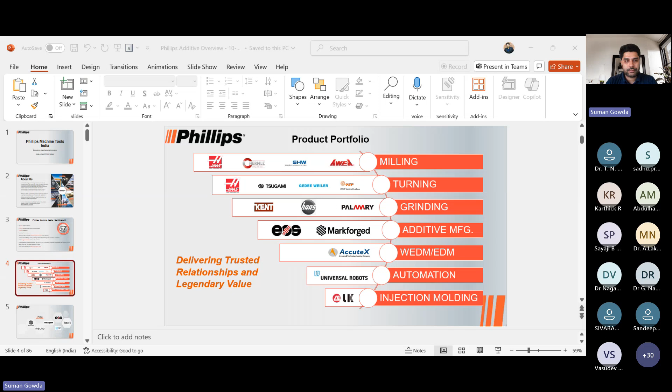In Phillips Machine Tools, we represent numerous varieties of products. Additive is... sir, your voice is low. Okay, let me turn off my video as I'm starting the session. I hope the network should be clear now.

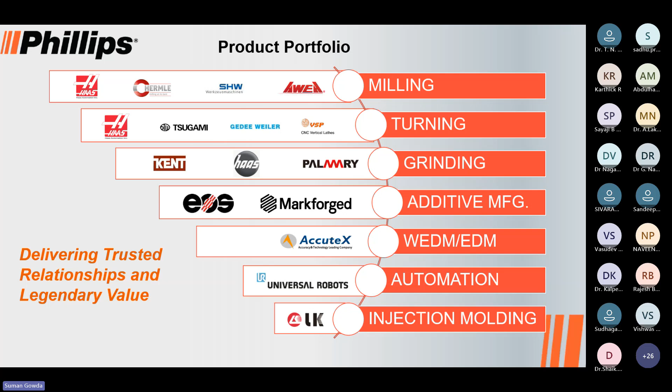Additive is one of our verticals which we started around 6 years back, and now we have close to 8 different solutions in additive, catering to applications across all varieties of materials, from metal grade materials to composites to resin to powder. We also have research-oriented materials used for direct metal deposition, and processes for laser melting of wire and metal powders. As I mentioned, in today's session we will concentrate on composite grade printing, and we will also look at liquid-based printers.

Coming to the printer portfolio, as you might have seen in the last couple of days, there are a lot of varieties of technologies in 3D printing alone, which give different kinds of solutions. Some solutions are for printing parts for prototyping applications, some for end-use or one-time use applications, and some can also be used for mass production, where the tooling cost and printing cost can be compensated. So now we are in an era where we try to bring 3D printing to almost all verticals and applications wherever we can. Looking at that, composite-based printers are one of the major highlights.

This is a process where you can print parts which are as strong as aluminum. But imagine the printer you use for printing it is a simple desktop printer—you just place it on your tabletop and print a part, and that part is as strong as aluminum. That's where the major strength of composite-based printers and materials comes in. So we will have a thorough look at that particular technology.

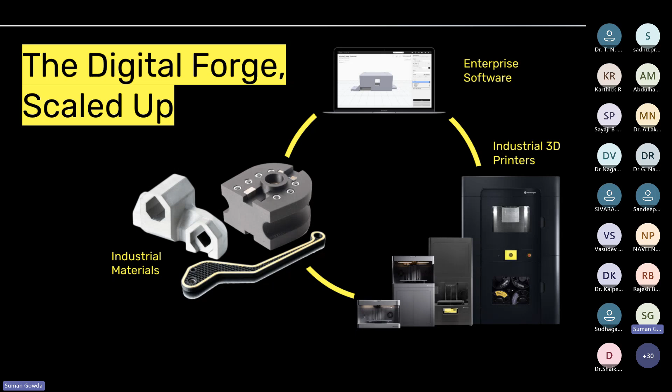To give you a concept of how the technology works, I'm sure you've seen an FDM printer printing. The concept is the same as FDM printing, and this has got 2 nozzles. If you've used printers with 2 nozzles, one is for the plastic and the second is for the support. Whereas in our Markforged, the first nozzle prints both the model and support, and the second nozzle is dedicated only to printing the fiber.

The fiber acts as the main strength, like a pillar of a house or building. The main strength for pillars are iron bars, and we use cement and concrete just to surround it so the iron rods aren't exposed to the external environment. We follow a similar concept: we build a boundary using regular plastic, and inside that boundary, our continuous fibers get deposited. The plastic we use for regular printing is also a composite grade material called Onyx.

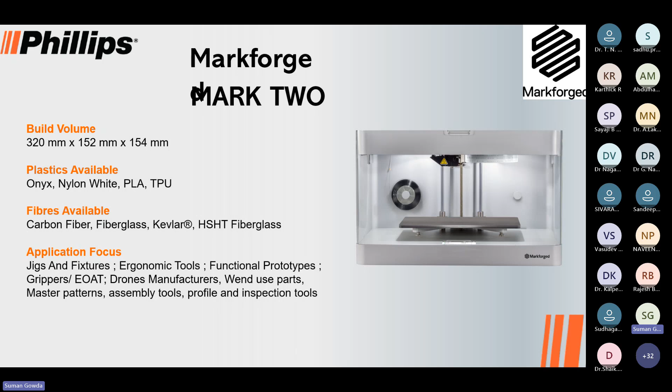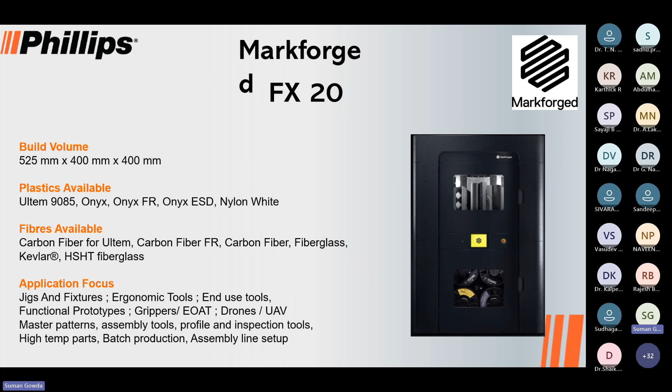Because of the heat, the fiber gets bonded with the plastic. As we build it layer upon layer, the part strength increases by 10 to 20 times. We always have an option to select the amount of fiber we deposit. We can deposit fibers at 100% throughout the part, or hardly 10 layers in 100 layers. Or if my part is 100 mm, I can have fibers in the bottom 5 mm and top 5 mm. It completely depends upon me how I want to add the fiber.

So now moving to the next step, which is the applications of this. The reason I'm talking about applications is because whenever we look into an FDM grade machine, we always start with prototyping, we always start with fitment.

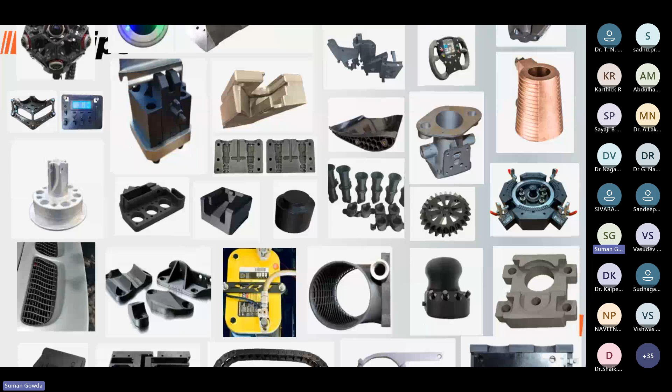But imagine an FDM grade printer where we talk about applications similar to that of metals. Whenever you consider a metal grade printer, worth around 1 to 2 crores or even more, we talk about manufacturing of tools, grippers, and dies. Those are the same applications we talk about with a composite based 3D printer.

Because the composite based 3D printer gives us an advantage that none of the plastic printers can provide. At the same time, when necessary, the same printer can also be used for printing regular plastics, since we have the option of printing with regular PLA and rubber grade material in the same printer. But the main USP of this printer is printing with continuous fiber, which gives extreme strength to the part.

Yes, we hardly utilize 100% of the fiber strength, but even if you are able to utilize 50% of the fiber strength when we deposit in the parts, we are still getting parts similar to or superior to the strength of aluminum.

We have got a lot of customers who have started their production even without a CNC machine. They are printing all kinds of clamps, holding grippers, and tools using a small FDM-based composite 3D printer, which can give them parts as strong as aluminum.

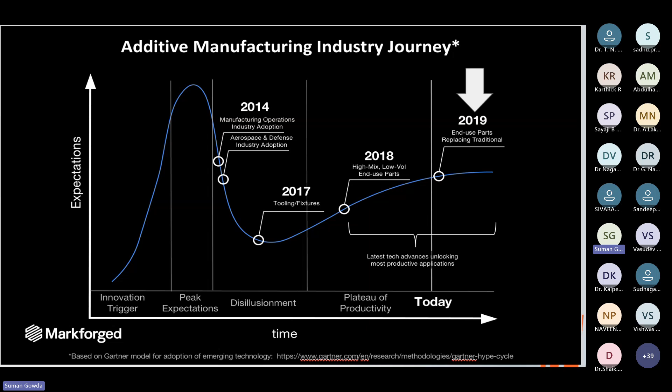Metal is the front runner for a lot of applications when we're talking about conformal cooling or applications which require a hybrid process. Composites also give a huge advantage when we consider using composite-based materials for producing end-use tool parts.

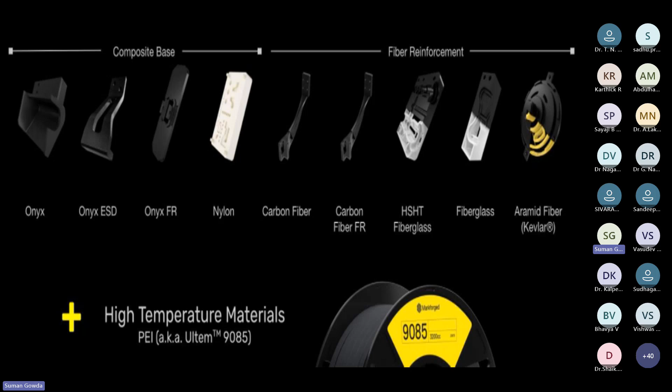But the best thing is we even have software which tells us what percentage of fiber is required for the load that is being applied. For example, if you are going to...

Let's consider the same part, a turbine housing where you're going to mount it and apply a load of around 10 kg—then a regular plastic like our Onyx is sufficient enough for the job. But if the weight is 100 kg, then we also get to ask the software.

So this is the kind of application, and this is where I'm going to apply the load. What should be the fiber reinforcement for this part? The fiber software itself tells us what kind of fiber is required.

You can get to know more about it as you work on it. Once you've started working on this, you can take a judgment and say this will require fiber of around 20%, or this will require fibers in the boundary that's sufficient enough. But if you're not able to make that judgment, the software itself will tell you what needs to be done, so you don't have to make trials to get the best settings for the print. The software gives the solution to us.

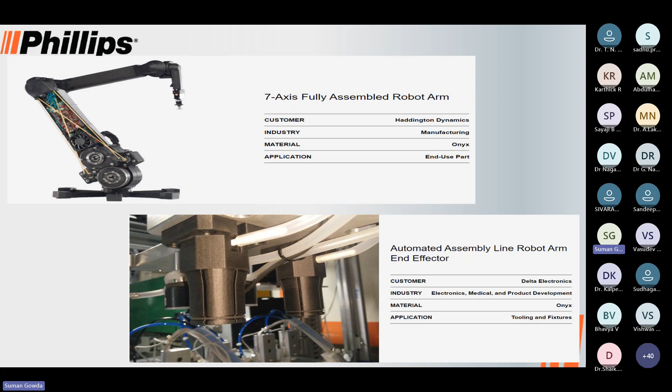Here are a few examples of parts printed with regular plastics. Even though it's a regular plastic, it is still superior in strength to ABS, and it can withstand numerous chemicals and more than 150 degrees of temperature. That gives it a huge advantage for a lot of end application needs. This is a small graph comparing ABS and nylon grade to the Onyx grade material.

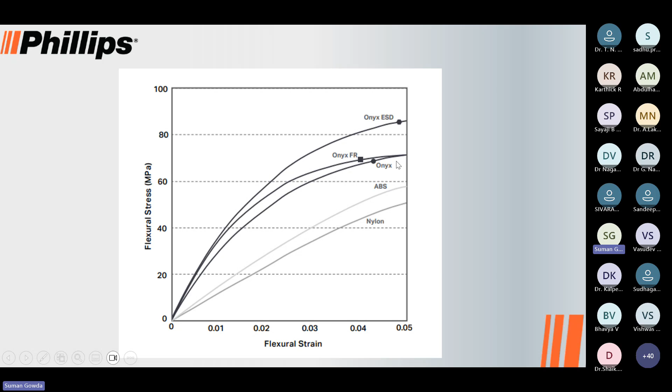When we talk about continuous composites or fibers, there's a huge difference when we add a small amount of fibers and mix it along with our plastic components and draw a wire. So this is what you get. The first image is actually the chopped carbon fiber, and when we get our regular onyx plastic wire, that's a combination of nylon plus this amount of chopped fibers. This will give me strength which is only 2 times that of a plastic.

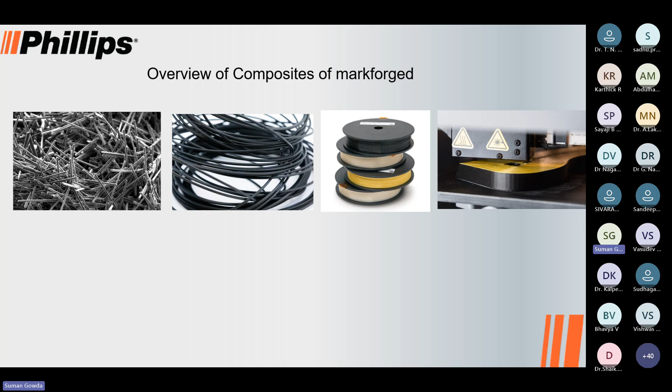But the main strength comes when I utilize the continuous fibers. This is how the printing would happen of a continuous fiber. As you can see, the black is deposited on the boundary, whereas the yellow, which is the continuous Kevlar fiber, is being deposited on the entire part as per my end application. Because of this fiber, I am going to get a unique strength.

In the image, if you can see, it's the software image. If you're able to see the blue line, this is the fiber path. In this part, we've decided to give the fiber only in the boundary, whereas the infill geometry is still around 30%. So this part is now 50% lighter than the existing aluminum part, but it's still giving the same strength. I can even increase the strength of the fiber by increasing the fiber lines so that the strength becomes more superior based on my requirement.

So the advantage I get over this is the strength to weight ratio is completely under our control. We don't have to depend upon just the density of the part. I can still go lightweight even more than this, but still achieve the same strength required for my end use. So here's what the components would look like once we deposit the material.

As you can see, we have the fiber deposited only in the boundaries. This kind of deposition we call external and internal boundary, so it has covered the fiber with the external boundary, and also the circles are being covered, because there's a point where I might have to do the clamping, and that particular area needs to be strong enough to withstand the clamping force. So I've given fibers even on the circles. It depends on my end application overall.

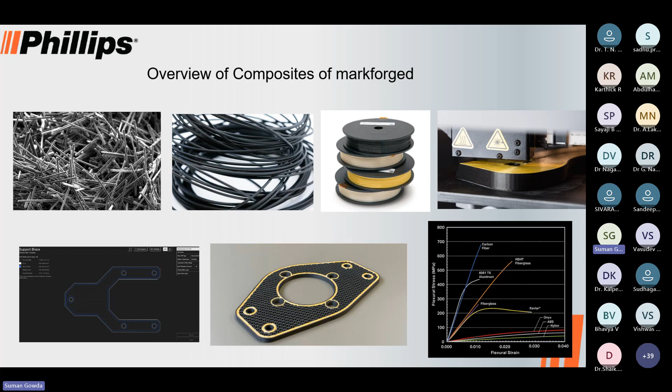These are the kind of things we are actually doing, working out with a lot of institutes. Here's a small example of a small chain link that was printed using an onyx plus carbon fiber combination, and you can see the kind of strength that this particular small part can withstand.

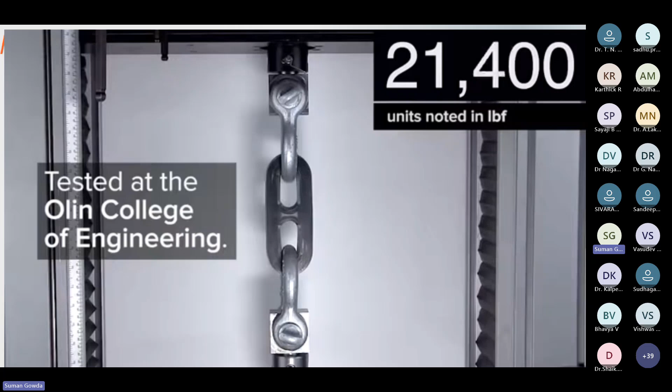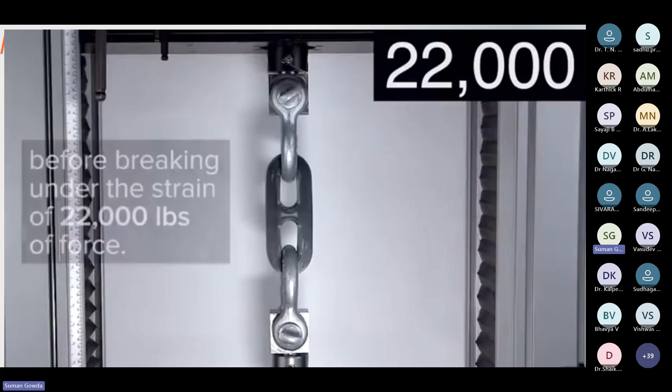So as we saw, the small chain link was able to stand around 22,000 pounds, which in reality is almost similar to lifting a cement truck. Yes, if needed, I can even lift such a huge weight. But the important point here is it only works when we are using the load at the same angle. If I change the angle of my load, maybe it will not even stand 10% of the load, right?

So that's where we talk about design for additive manufacturing. With the Markforged, we also say design for your part or design for your printer. Because when we exactly know that this is what I need to do, or this is what this part wants me to do, I get a complete advantage of this particular aspect.

That's one reason why drone companies have been able to utilize this composite based printer to its maximum potential. Even though they know that this particular part will not be able to withstand around 100 kgs of impact load, for them the main application is just a holding clamp, and if this part can do that job, it's more than sufficient for them.

So that's how we usually go about 3D printing for the exact materials. As you can see, we can print parts used for end use tooling applications, which are very high complex gripper parts, or also used as a maintenance part. This particular part in the middle is an end use maintenance tool, which is like one third of the weight of an original component.

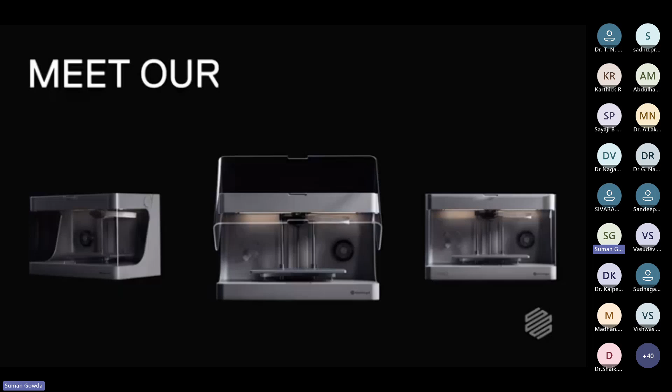Printer, which in my opinion is one of the most useful items you can put on your desk. Our desktop series consists of the Onyx One, the Onyx Pro, and the Mark Two. The product line offers incredible versatility in the applications you can address, and we do this in part by designing everything that goes into your printer. Our machines, materials, and software were all designed to be tightly integrated into one platform we call the Digital Forge. What does this mean for our users? It means every part you upload, slice, and print is streamlined, simple, and optimized for incredible surface finish, accuracy, and mechanical properties. With other 3D printers out there, users may rely on one company for the hardware, another for the software, and a third for the materials. That introduces a lot of uncontrollable variables that can lead to negative consequences like sketchy print quality and a lot of trial and error just to get your part to print the way you want. By contrast, Markforged makes the hardware, the software, and the materials to guarantee the highest quality. The Digital Forge offers a degree of harmony that just isn't achievable when you're trying to overcome the many variables introduced by combining a hodgepodge of systems.

From day one, Markforged set out to address 3D printing differently by creating parts as strong as metal right on your desktop. In 2014, Markforged invented and patented carbon fiber reinforced 3D printing, or CFR, which allows users to make parts as strong as metal just at the click of a button.

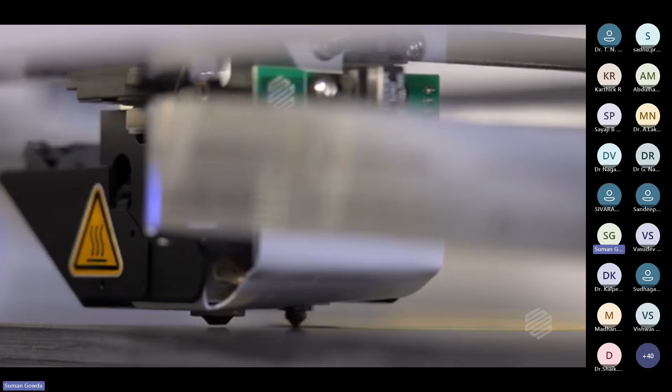Our CFR technology is objectively awesome. It starts with two materials, a spool of base plastic and a spool of continuous carbon fiber. We first deposit a layer of plastic out of a hot nozzle and onto the print surface. After that, a second nozzle comes in and irons down continuous fibers right on top of that plastic layer.

The printer builds the part layer by layer until it sends you an email letting you know that your print is complete. Right off of the printer, the part has properties comparable to aluminum, all at a fraction of the cost and weight of a CNC machined equivalent.

The core element that ties these and all of our printers together is the software. It's called Eiger and it's free to use. The best part is you can access it from anywhere. You just navigate to eiger.io from a Google Chrome web browser and voila!

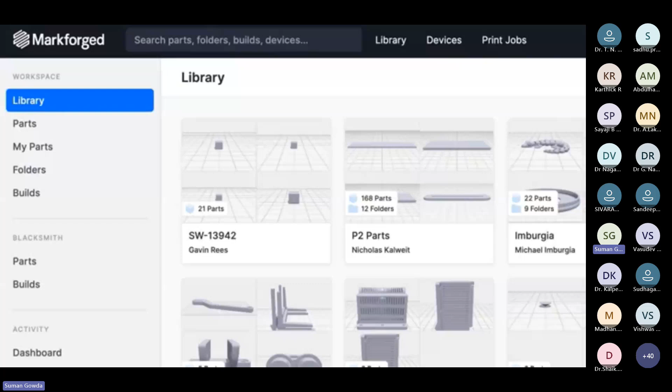I've literally kicked off prints in the back of an Uber. Seriously, for all you folks out there plugging in USBs to the back of your printer, back of an Uber.

Eiger isn't just a slicer. It's an all-in-one part library, version management, and cloud collaboration tool. It will, of course, slice your part, meaning it converts your part into a set of instructions that's readable by our printers. But our slicer is optimized for our materials and printers, meaning there are fewer steps users need to take to get a great part out of the printer.

While Eiger is super simple to use, it's also designed to give power users the unique ability to control where continuous fibers go in the part and how the part responds to mechanical stresses.

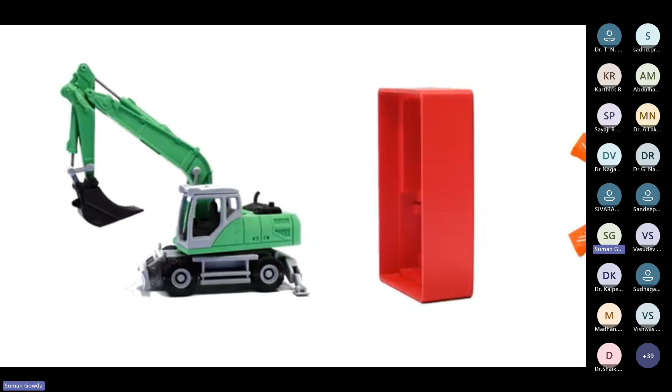All told, the Markforged Desktop Series printers empower you to address the widest variety of applications, from prototyping to end-use parts as strong as metal. Our printers offer a simple-to-use system that makes some of the best-looking parts you can build at your desk.

We knew from the get-go that people were going to use this printer for incredible applications like high-strength tooling or even production parts. That's why the team sweat the details that are immediately evident when you pop the hood of this machine. The single-body aluminum chassis the printer rides on was deliberately engineered to resist the torque induced by the belt drive system. Why does this matter? The stiffer frame results in higher accuracy and improved surface finish, resulting in the high-quality parts that Markforged is known for.

The precision extruder constantly pipes data back to the system to monitor the health of your print wirelessly. Even the coupling mechanism used to secure the print bed uses magnets and is repeatable to within 10 microns. That's nearly 7 times smaller than the thickness of a human hair.

In addition to carbon fiber, we innovated printing with 3 other continuous fibers dedicated for specialty applications, including high temperature and high impact. We also recently announced our own version of PLA, which we call Precise PLA, offering our users a new, more cost-efficient means of validating designs before going into production.

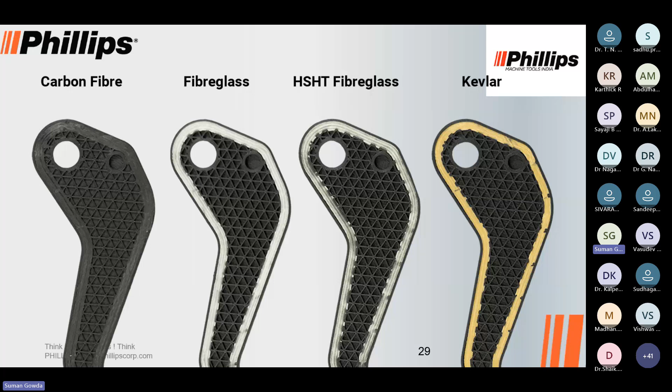So here are the fibers of 4 different types: carbon fiber, glass fiber, HSHT fiberglass, and Kevlar. There's a slight color difference for identification and chemical composition, but overall different fibers give different kinds of results.

Okay, so before I play this video, this is just to highlight how the printing will actually happen on the printer with the continuous fibers. I will keep on explaining as the video plays. So now this is the base.

So this is the base material, what we have is the onyx, which is the black material, and then we deposit around 3 to 4 layers of this onyx just to make sure that we have a good amount of bottom surface. And then you can see we have started to deposit this blue line.

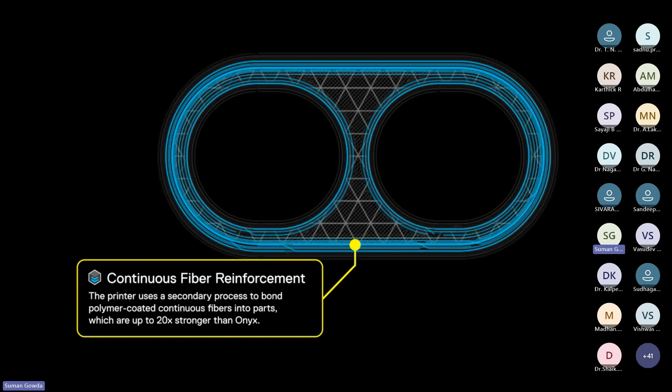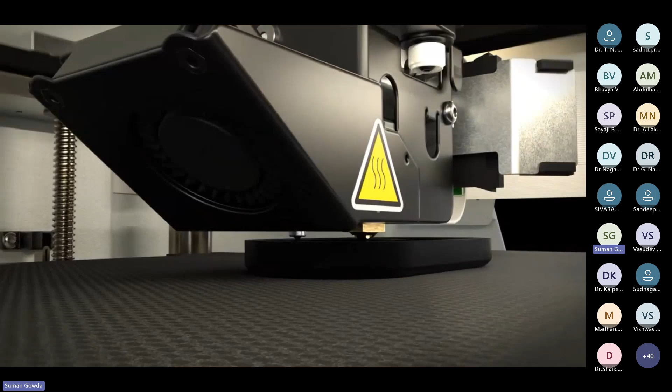So these blue lines are actually the fibers. As of now in the settings we have selected fiber only in the boundary, so we are depositing fibers in the boundaries of the part, and the remaining section is being printed with the onyx. If you closely observe, the external boundary is built with onyx. There are two nozzles: nozzle one prints the onyx material, whereas nozzle two deposits the fiber material.

And when it deposits the fiber material, we are not melting the fiber. We are just pressing the fiber on top of the plastic that we had printed as an initial base, so that the fiber gets bonded with the plastic.

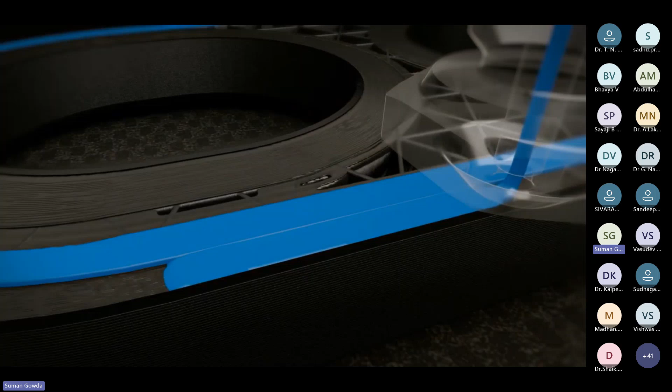So the nozzle in the back has the job of printing with the plastics, and the nozzle in the front does the job of depositing fiber. As you can see, it's a circular fiber material, and we are going to press it, and then it's going to turn into a rectangular shape.

This pressing, everything is pre-calculated from the software. We also have a small cutter which cuts the fiber just before the end spot, so that the fiber doesn't get stretched once the printing of that particular layer is completed.

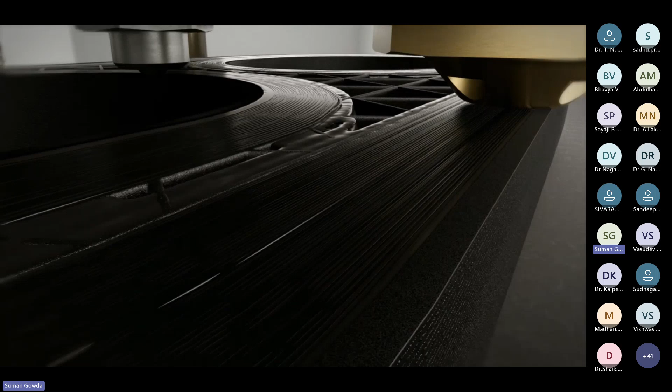So this is just to showcase the material while the printing is happening.

If you look into the kind of X-ray version view, the white material is actually the regular plastic, whereas the blue is the fiber material.

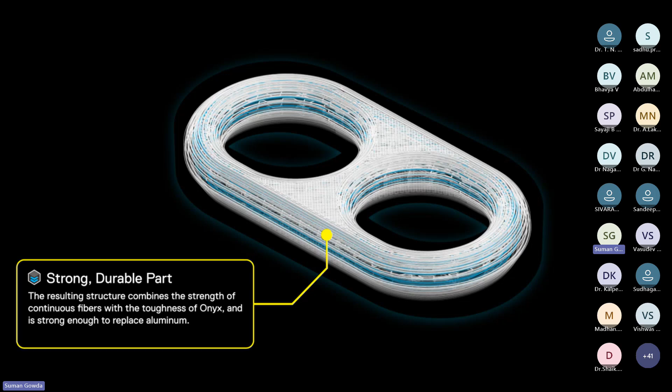So now it depends, like, I'm going to get the same amount of fiber when the part is in a laid down position, but when the same part is in a standing orientation, the amount of fiber that is being deposited will be completely different.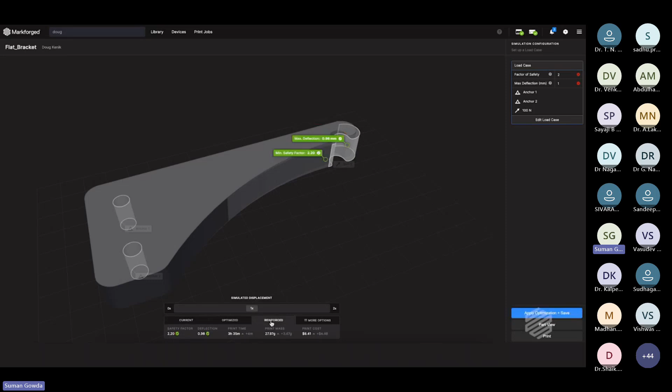And cost. With 3D printed parts in particular, finding the right balance of settings to meet functional requirements can be difficult. We need the part to be strong, quick to print, and cost effective. In the past, we'd have to print and test multiple iterations to dial in the settings, taking a lot of time and materials. Not anymore. Simulation from Markforged allows you to test your part virtually to see if it will be strong enough. You can then optimize print parameters, including placement of continuous carbon fiber reinforcement, all before you hit print for the first time.

So let's use this lever as an example. You need it to hold a 100 Newton load with a factor of safety of at least 2, and it can't deflect more than 1 millimeter, and needs to be as light as possible. How would you achieve that?

Let's look at 3 different variants of the lever. The first was printed with default slicer settings. The second with a solid infill. The third part is optimized using simulation.

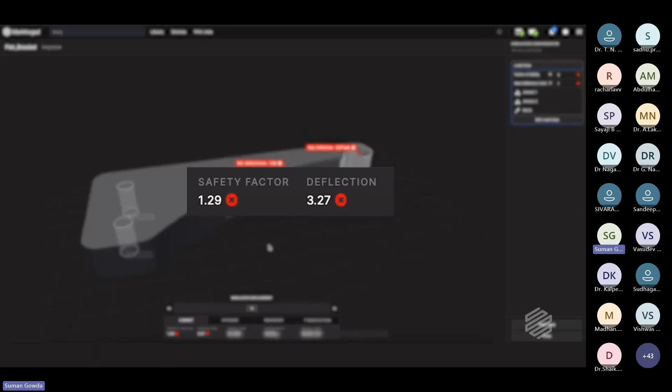We can see in Eiger that the first part took 3 hours and 32 minutes to print. It's not strong or stiff enough for us to use. The second print, with solid infill, took 6 hours and 19 minutes to print. It meets the factor of safety of 2, but has a maximum deflection of 1.8 millimeters.

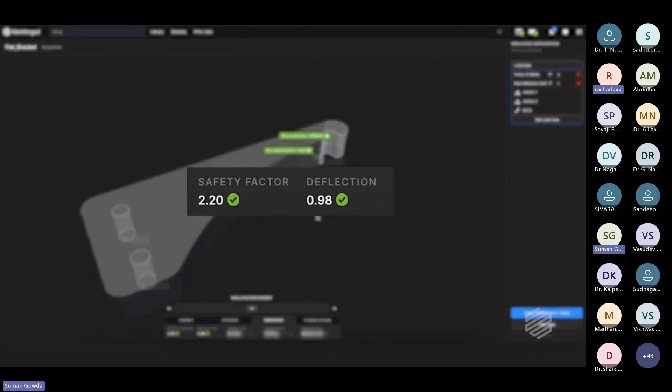The third print, optimized using simulation, took 3 hours and 41 minutes to print. It meets the factor of safety of 2, cutting print time almost in half with the same required strength. With simulation, it took only a few minutes to simulate and optimize this part, meanwhile it takes 14 hours of printing just to arrive at the same conclusion.

No more guessing how much or where to place fiber, or spending countless hours on print-break cycles. Print the right part the first time. For more information on how simulation can save you time.

Okay, so this was just to showcase the benefits or advantages. Once you have started using this software, after working on it for a couple of times, you would have mastered the process of finding the best optimum. It also helps once you've done a few studies or trials on printed parts, so you get to know the best settings for what kind of weight or load being applied, and the varieties of aspects involved.

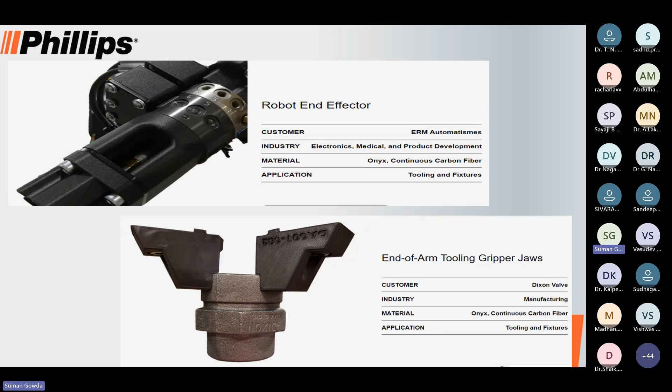So here are a few applications, like robot end effectors or end-of-arm tooling grippers, which were actually machined using aluminum or stainless steel parts, now being replaced with onyx plus fiber combination parts. So you can see a lifting tool.

This lifting tool can lift a weight close to around 900 plus kgs, and a clamp bit, which is a regular simple clamp bit, can hold a weight of around 50 kg. The advantage here is they are using the same clamp bit, just changing the grippers, and it can be used for 5 different kinds of part holding.

And the best thing is they can get all 5 different grippers printed overnight. So they don't have to allot a particular CNC machine for this job, or consult a programmer to write a program for machining, or have the designer wait in the production lab for these parts. He can just fire the print from his own designing seat, and the parts get printed. And as the printers are cloud operated, he can even fire the print from home, and get the part the next day when he reaches the facility.

So these are all the different advantages which the printer provides. Anyway, we have seen this video.

So these are a few of the replacement parts that we have personally done, like some parts which were freshly machined aluminum, easily replaced with onyx plus fiber, or a casting part, or a sand casting application part, or parts which earlier used the casting process, replaced with 3D printed composite parts.

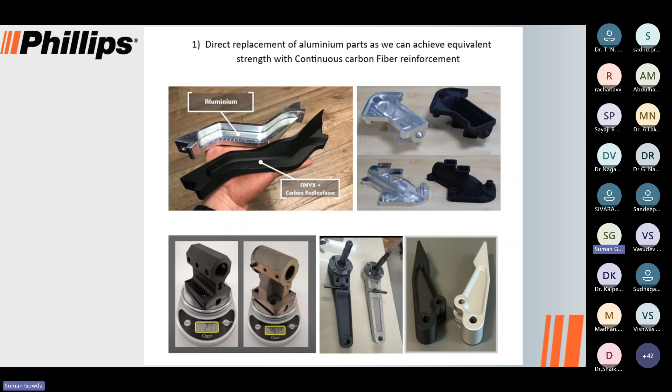The gripper applications, which was actually a complex gripper using the casting process, can be 3D printed within a couple of hours in-house without any worry, matching the same strength and same life of the gripper. So these are a few examples which talk about how we are. This is one of the examples from a company called Siemens.

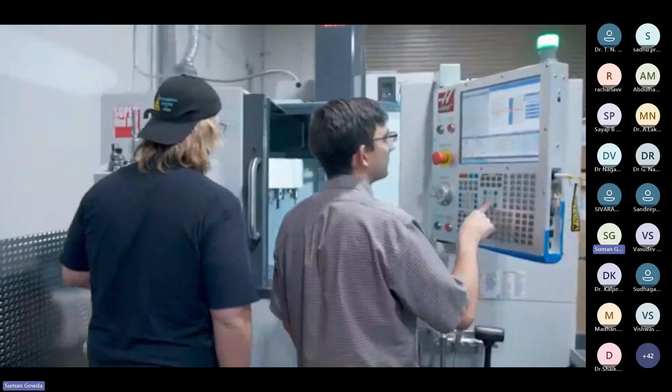The Innovation Center is an end-to-end solution provider within Siemens. We're able to take a concept all the way to final implementation, all under one roof. We saw the capabilities of the Markforged printers and the finished quality of the prints, the strength of the material, and we wanted a more industrial printer to fast prototype and potentially use as final tooling.

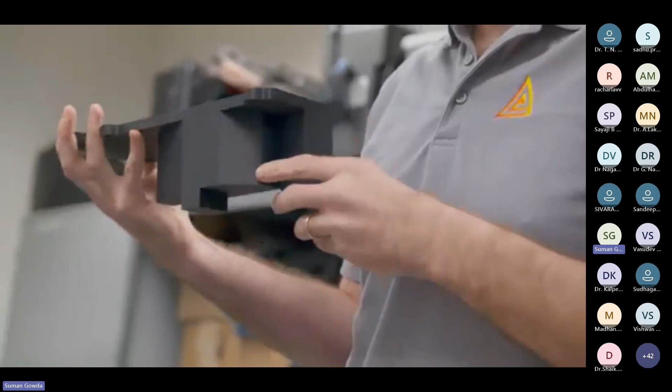When we first used the Markforged printers, a lot of people thought it would just be used for prototypes. There was an initial surprise by our end users that we were actually giving them a 3D printed part they could use in the field, a repair facility, or manufacturing facility as the actual tool.

The major benefit of having the 3D printers in-house is that the time to develop an idea is dramatically shorter. Within a day or two, we can go from an idea we whiteboarded to a CAD model to a 3D printed part in our hands. It drives the cycle time down as well.

The Markforged industrial printers act as a digital factory for us. In the past, you would have to make design decisions and down-select during the design phase. Now we can take three or four different designs, print them out, do the form function test, and then make a decision which way to go forward. It allows us to cut costs, and that money is realized back within the business units.

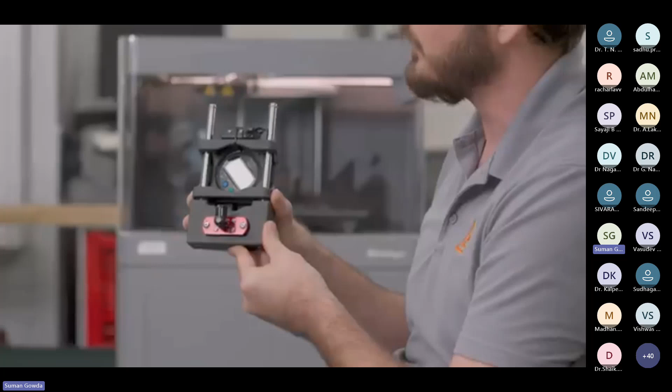With the Markforged 3D printer, we get great resolution on the parts. It looks like a real tool that you would buy from a store, something that would be in production.

If there's an issue with one of the gas turbines out in the field and it has to go down, that means the lights go out or power has to come from somewhere else. So we developed this contoured cutback tool that allows technicians to make a precise cut exactly where they need to. This entire contoured cutback tool has been 3D printed. The only off-the-shelf components we had to use were some screws and the actual pneumatic spindle.

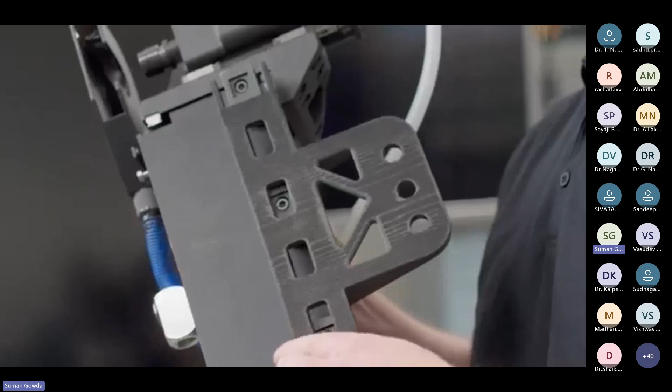We were printing this tool as a prototype, but we found that the Markforged carbon fiber composite material is actually robust enough to withstand field use. So we developed four kits that are deployed locally.

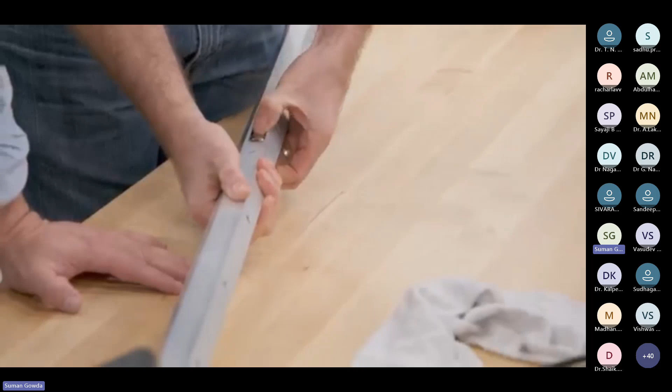The Markforged printers have allowed our engineers to be more innovative by encouraging them to fail fast. It allows them to print multiple different designs and make changes without having to do that in a design space, and it allows them to get to a final solution quicker, to respond to the rapid prototypes we have to develop for our business. With additive manufacturing and the industrial Markforged printers we're using, the sky's the limit.

This was one of the perfect examples of coexisting in the production line, where 3D printing can be used for the same application. Usually what we used to see was that we had to have a highly complex metal 3D printer to have applications for production. But considering the cost per part of a metal 3D printed part, we would not consider it for production — it was only limited to R&D prototypes.

Or it might be something made from aluminum or a cast metal part, or something made from an injection molded part. A lot of varieties of those kinds of parts can be replaced, and as we can see, it can include applications involving air tightness, leak proofing, or ESD properties. We have materials that are ESD safe, and we're talking about FR grade — we have materials which are flame retardant.

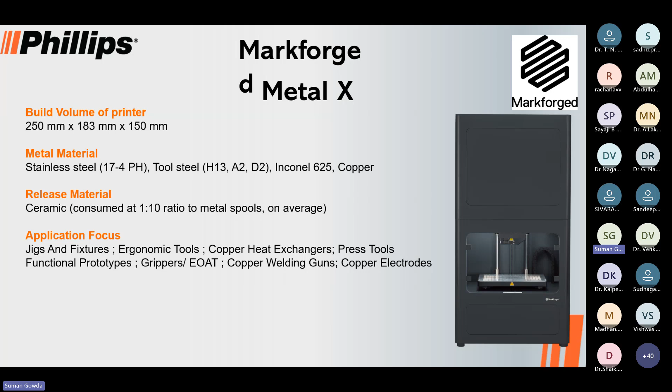Yes, there are a few additional equipment needed for metal like wash and sinter stations, but this gives the advantage that the printer will not stay idle. It's not like if I don't have metal projects my printer stays idle for a month - that's never the case. You can always opt to print composites or plastics whenever needed, and then maybe once a week or once every 2 weeks you get a metal project, you can just swap and print a metal part, which can then be washed and sintered.

So these are the different steps. Before I explain these steps, I'll play a small video so it gives you a complete clear view of metal printing using the Markforged system.

Hey everyone, I'm here to talk today about the Markforged Metal X process. It's a simple, safe, and cost-effective method to go from design to functional metal part. There are 3 steps in this process: printing, washing, and then sintering.

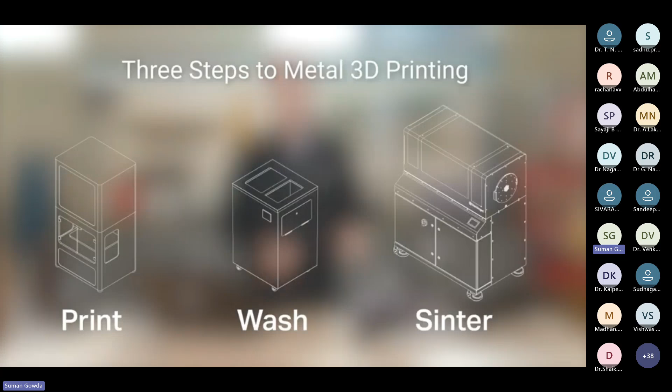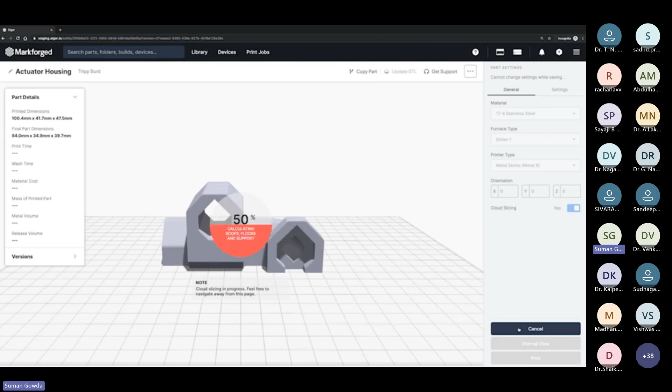First, let's start with CAD. You design your part, then export to STL and upload into Eiger. Eiger is a cloud-based slicing and print management system that comes with every Markforged product. This automatically configures your part based on the material and printer you've selected. When your part slices for metal 3D printing, it gets scaled up to account for shrink and deformation in the downstream processes. It then slices your part into discrete layers, identifies overhang features, and builds supports and a raft underneath your part. As we go through printing, washing, and sintering, Eiger will monitor the part's progress along the way. Let's start this print and go to the Metal X.

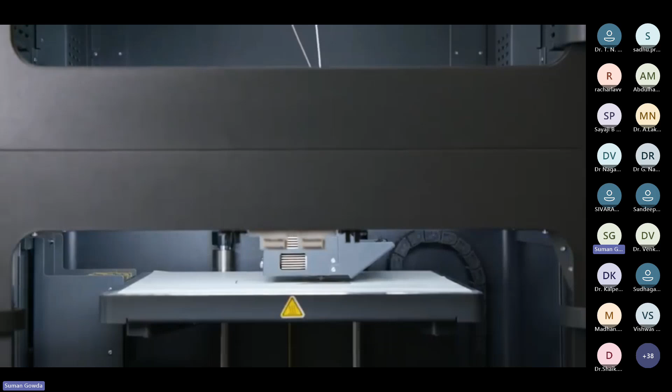Before starting a print, the machine automatically maps and levels the bed to ensure the first layer goes down well. Your print is built of 2 materials stored in this heated chamber above: one ceramic release material and one metal to be printed. This filament material is metal powder safely suspended within a 2-part plastic binder. It gets heated and extruded onto the build plate where the part is created layer by layer. The release material gets extruded as an interface between the part and its supports, so that once your part comes out of the furnace, it's easy to remove.

Unlike other metal 3D printing systems, this process does not require loose metal powder, resulting in a safer and more cost-efficient workflow. 17-4 stainless steel is loaded now. However, with a quick changeover, the system is capable of printing in stainless steels, tool steels, coppers, Inconel, along with several other materials currently in development.

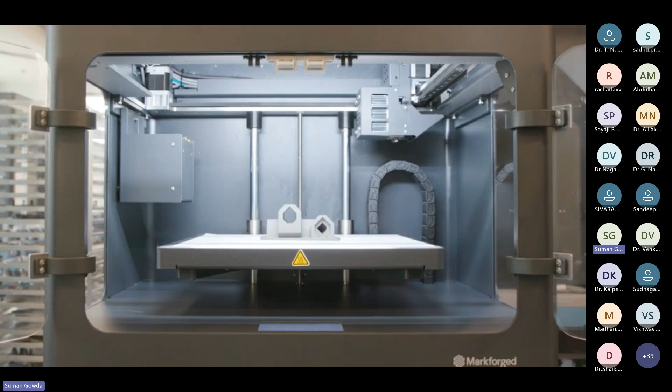Once your part is finished printing, you'll get a notification. At this point, you can go to the printer, remove the part from the build tray, and clear the bed. Now we have what's called a green part. It doesn't really look or feel like metal. However, a large part of it is comprised of metal powder.

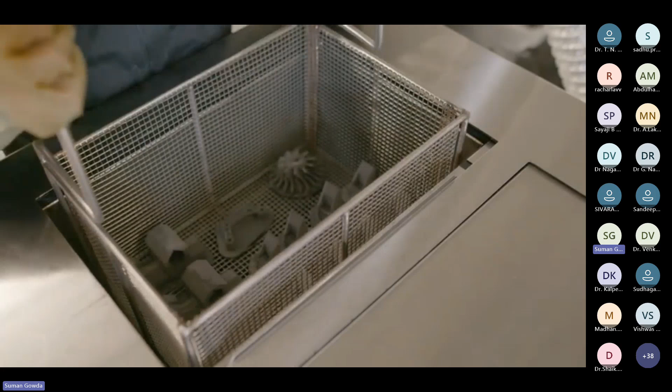Next step will be putting it into wash 1 for the debind process. The wash 1 removes the first stage of the binding material. A green part is taken from the printer and placed into the wash basket, which is then lowered into the solvent. Wash times will vary, ranging from a few hours to a few days, depending on the thickest region of your part. After that, it's now called brown part and is ready for sintering.

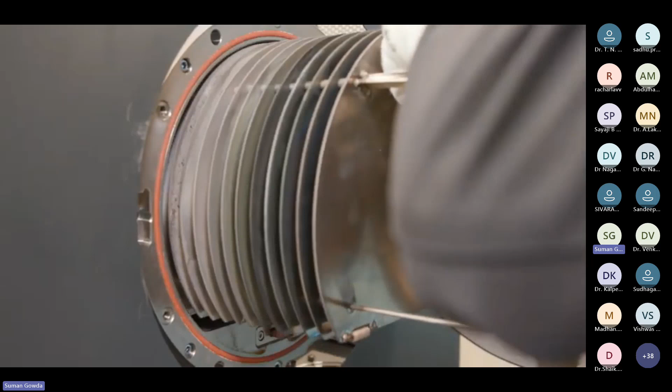Let's go over to the furnaces. This is Sinter 2, a furnace designed for mid-volume production runs and larger printed parts. Sintering transforms a print from a lightly bound collection of metal powder to a fully finished metal part. First, the temperature ramps slowly to burn away the trace amounts of remaining binding material. Then, temperature ramps closer to the melting point of the material, allowing metal particles to start to fuse together to create a strong metal part.

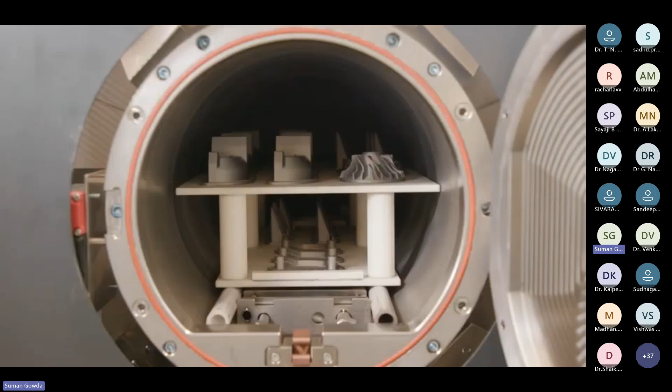Markforged sintering furnaces use a carbon-free retort to ensure part quality and alloy composition standards are met for our finished pieces. Each run takes about a day and can be monitored remotely using the Eiger software. Once a run is complete, the setter tray full of finished metal pieces can be removed from the furnace. Once removed from the raft, these parts are ready for use.

In the furnace, the layer of printed release material between supports and the raft and your printed part remains powderized. This allows the structure to be tacked to the raft to better control shrink and accuracy throughout the process, but also an easy release after sintering.

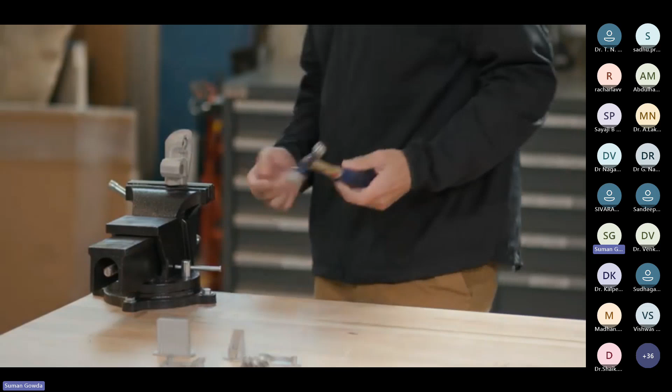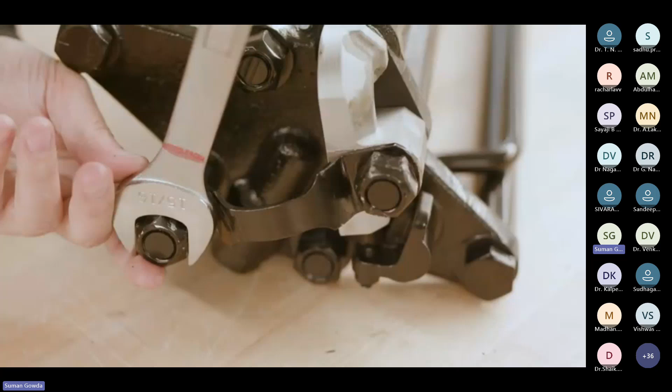At this stage, your part is fully sintered and ready to be used. It can be post-machined, polished, or otherwise processed as necessary for the final application, but in many uses, the accuracy and strength are good enough as is. It's ready for install. Check out markforged.com for more information about our simple, safe, and cost-effective method of metal additive manufacturing.

Okay, so this was the complete overview of the metal process. So now, as you saw, this is something which all of us can operate. This does not require any sophisticated kind of work environment. We don't have to worry a lot about the health or safety precautions, because this is something which can be used as a regular FDM grade printer. And then we can definitely utilize this for a lot of our applications and needs. This is just one of the solutions we provide with the metal.

We also do have printing with metal powders from EOS, which is a German-based company. I'm sure you might have seen a lot of sessions on metal powders. We also have a DED-based concept where powders can be directly sintered and then deposited on the required spot. So we have varieties of applications, and this particular technology of metal from Markforged, we have it in our Pune facility.

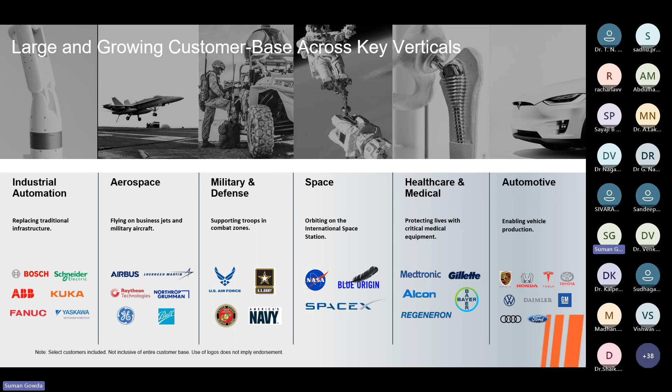So this was all about the Markforged, the composites and the metals. We're running out of time, but I'll quickly show you the liquid and the powder technologies. I won't go in depth since it's an additional topic I thought I'd introduce during our session.

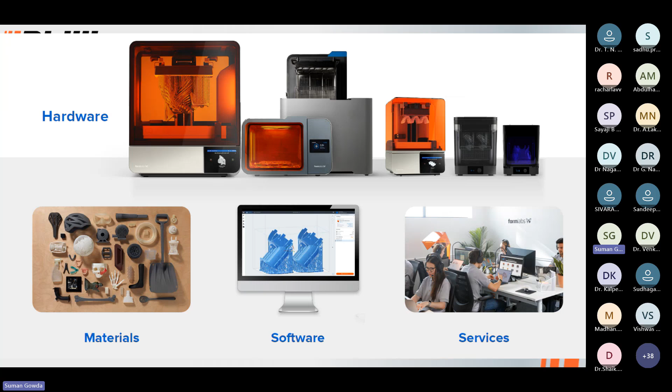The best thing is the speed, how fast the parts can be printed, and it can give different kinds of iterations. This might be similar to any desktop SLA model you've used, but in a much more controlled way rather than doing complete maintenance work daily. This gives reliability, confidence, and repeatability in products, along with accuracy and quality.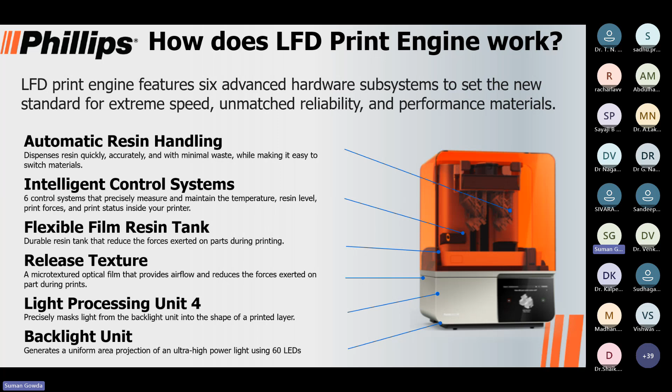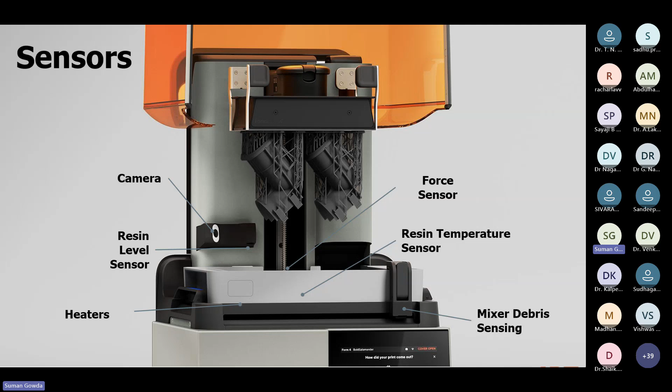We've got numerous sensors, numerous controls, and around 30 to 40 different material varieties for these printers, which makes it easy to identify where an error might have happened and resolve it. We have a smaller size version and a bigger size version of printers, giving us an idea of printing parts.

We can print standard general grade material, or engineering grade materials. We can also print biocompatible materials if required - parts for surgical guides, dental dentures, even teeth directly. We can print parts for rubber-like silicone, and high temperature materials that withstand more than 200 degrees. Some engineering grade parts can also be used as end-use parts for testing and pilot batch production.

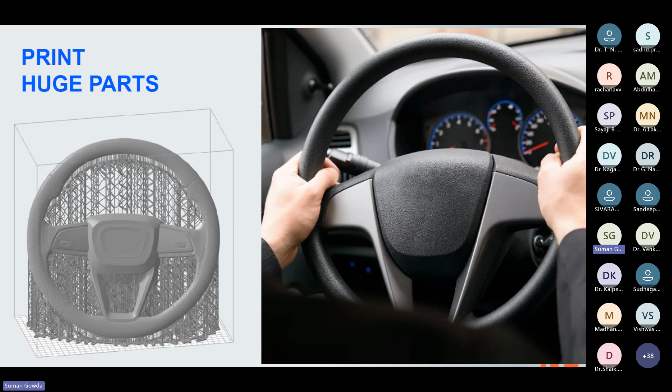So the liquid technology or resin technology has evolved a lot. These are the different grades of materials.

When we talk about different grades of materials, we have a general purpose category - regular general materials used for prototyping applications. Whereas the engineering section is the main area where we discuss how engineering grade materials can benefit us and their different kinds, because today materials are actually dictating the applications where they can be used.

We also have a study comparing injection molding with our Formlabs liquid printer, running a side-by-side competition manufacturing 1,000 components. Even though injection molding has complete tools and setup ready, we can still print 1,000 parts faster with the addition of 3 to 4 printers together. That's one of the huge benefits when getting 3D printed parts to the production line.

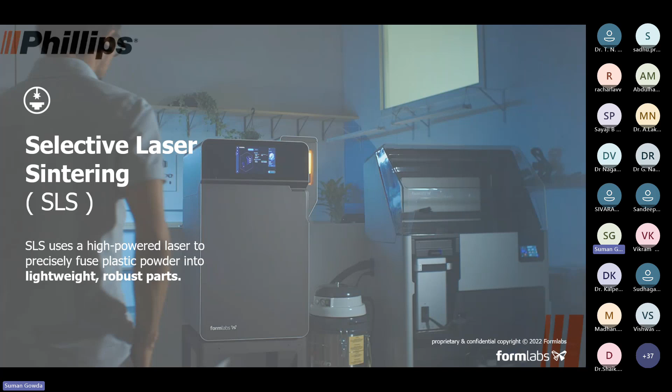And we have the powder-based technology, which is SLS. This isn't a completely desktop version of SLS, but it's a very compact SLS, rather than the SLS or powder-based solutions that take up an entire room. This occupies just the side of your table, can be placed there, and operated just like how you operate desktop printers.

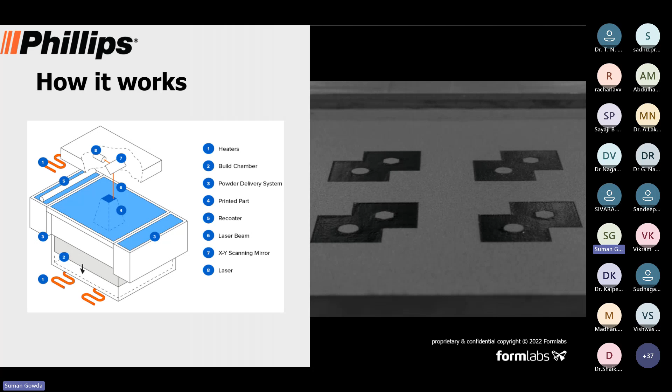The end result would be something that gives you parts as good as an industrial powder SLS. The reason to showcase this is because these are the kind of improvements that have happened around the industry, where printers have gotten so compact and so simplified that we can operate them just like our desktop printers.

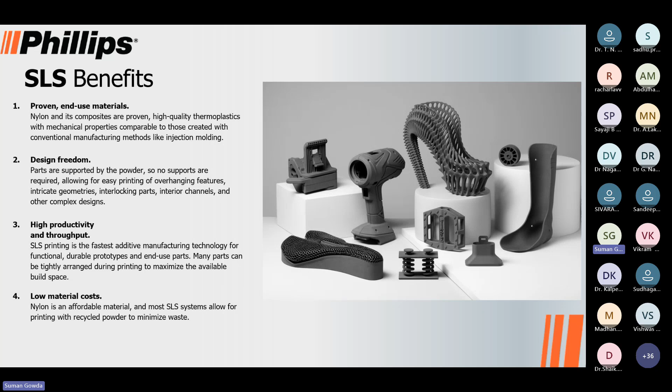Even though we are manufacturing such huge complex geometrical parts, we also need to manufacture smaller components of very complex geometry in hundreds of quantities. It can be done in just a couple of days, and then it can be done in-house. So that's one of the major benefits.

So these are the varieties of material. We are not limited to just 1 or 2 materials. We have a variety of materials depending upon your application and your research topics. And the best thing is Formlabs also provides an open material license. For example, with the liquid technology, if you have your own liquid you want to research, especially for academics, we have that open option so you can take the printer and use your own material to do R&D.

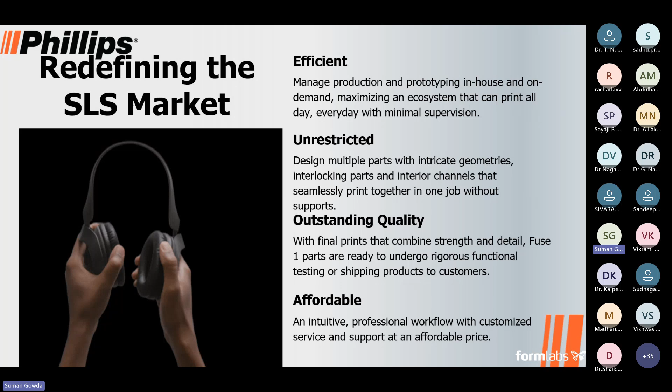And with powders, yes, there might be a lot of parameters that have to be set. But if you are someone doing that particular kind of research, you can definitely explore more even on the powder technology as well. So these are the benefits and advantages.

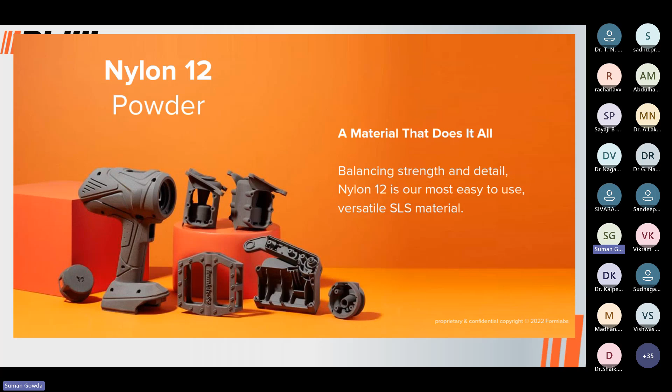So with regards to the nylon 12 powder, this is the regular SLS nylon 12. If you've heard the name PA2200, that might be from the EOS company - this is similar to the nylon 12 category, which gives good tensile strength while also giving good flexural and temperature withstanding capacity. But this particular material is not so good in certain areas.

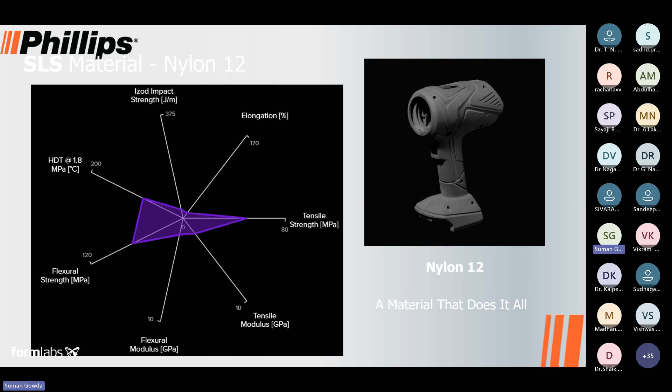At the same time, the nylon 11 materials have got completely opposite properties from nylon 12, with very good impact resistance and a slight improvement in elongation. We also have glass-filled and carbon fiber-filled variants.

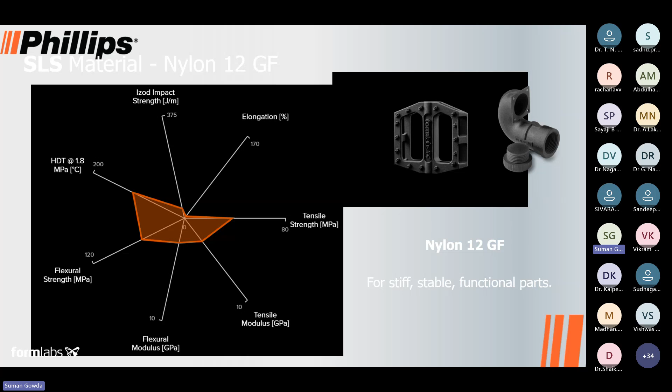The glass-filled material has its certain advantages, and you can get all of these study materials on our Formlabs website - just go to Formlabs and type in SLS materials. You'll see a lot of differences and benefits of which material gives which kind of advantages.